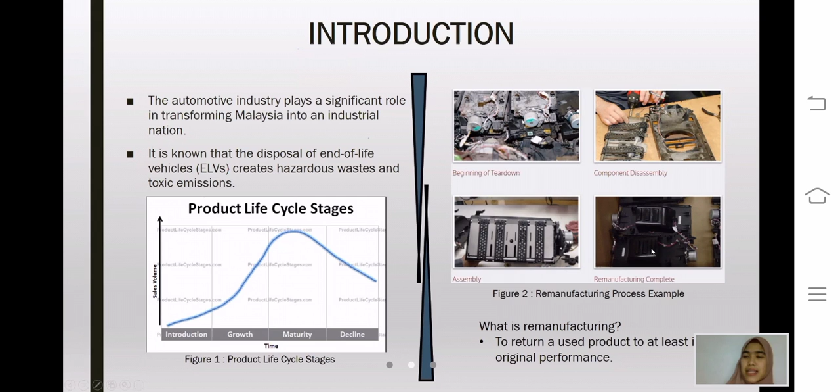Next is problem statement. There are three problem statements: remanufacturing will be considered as a new strategy to overcome the environmental sustainability problem, especially for the automotive industry.

As we know, in Malaysia, the automotive industry still follows the global legislation, namely the European Union Directive towards ELV, which is reuse, recycle, and reduce. The ELV vehicle will contribute to hazardous waste and toxic emission. It has been said by Vladimir Simic in 2013.

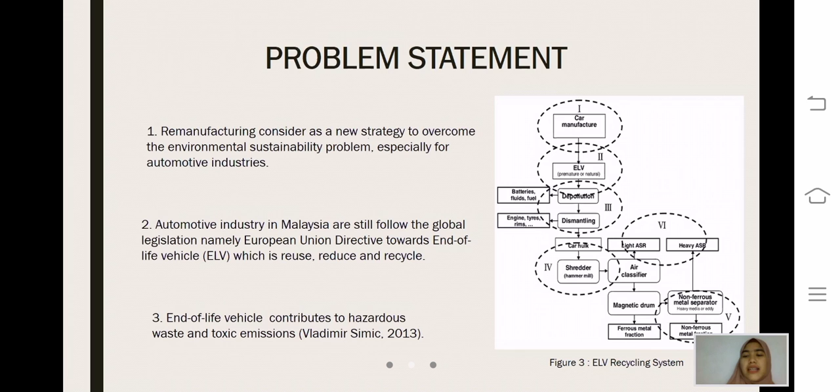Figure 3 shows the ELV recycling system, which has six stages of recycling system of ELV.

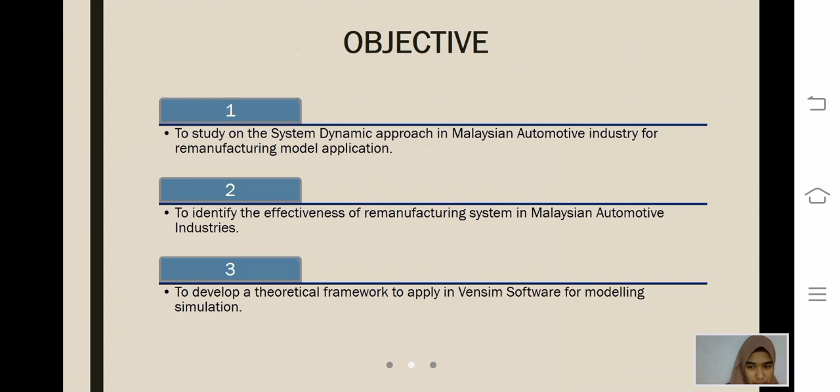In this project, there are three objectives: to study the system dynamic approach in Malaysian automotive industry for remanufacturing model application; second, to identify the effectiveness of remanufacturing system in Malaysian automotive industries; and third, to develop a theoretical framework to apply in Vensim software for modeling simulation.

For this project, we have made a literature review focusing on three main points: the automotive industry in Malaysia, the system dynamic, and the remanufacturing.

The production of vehicles has shown a large increase every year, as classified by Clark in 2015. Figure 4 shows the production of vehicles from May 2019 until May 2020.

In 2019, the production of vehicle was very high, but in 2020 the production of vehicle was low. This is due to the pandemic situation, the COVID-19 disease. If not for that, I'm very sure the production of vehicle in 2020 would be higher than 2019.

In Malaysia, the automotive manufacturer still prefers to use new parts in their product, even though it is possible to replace worn and damaged parts with recoverable components. It has been said by Amelia in 2009.

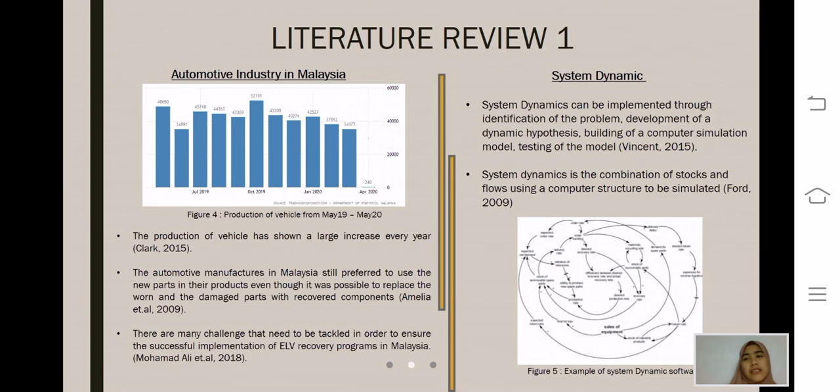Ford has classified that system dynamic is the combination of stocks and flows using a computer structure to be simulated. Figure 5 shows a simple example of system dynamic software, using the Vensim software. Next is remanufacturing.

Remanufacturing is a form of product end-of-life strategy, often called 6R. What is 6R? It is recover, redesign, remanufacturing, reuse, recycle, reduce. There are six, and remanufacturing is one of them.

Remanufacturing is the process of bringing an end-of-life product back to as good as new. It has been said by Shanshan Yang in 2018.

Figure 6 shows the example of the remanufacturing system model, which is after the end-of-life product is sent to the supplier, it will start the remanufacturing operation, and after the remanufacturing operation is done, it will commercialize back.

It will be sold to the client as the same product, but it's called a remanufactured product.

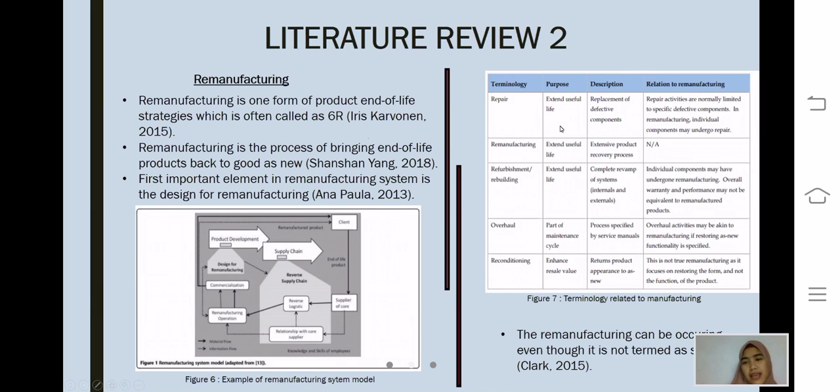Next, figure 7 shows the terminology related to remanufacturing, which is repair, remanufacturing, refurbish, overhaul, or reconditioning. But Clark in 2015 has said that remanufacturing can be occurring even though it is not termed as shown in this table.

Next is methodology. For this project, this is a flowchart for FYP1 and this is the flowchart for FYP2. In FYP1, I will complete up until the methodology process. This shows the flow process of this FYP.

For the planning flow process for FYP2, I will make analysis and research, and after that I will suggest a theoretical framework to be applied in the Vensim software to make a modeling simulation.

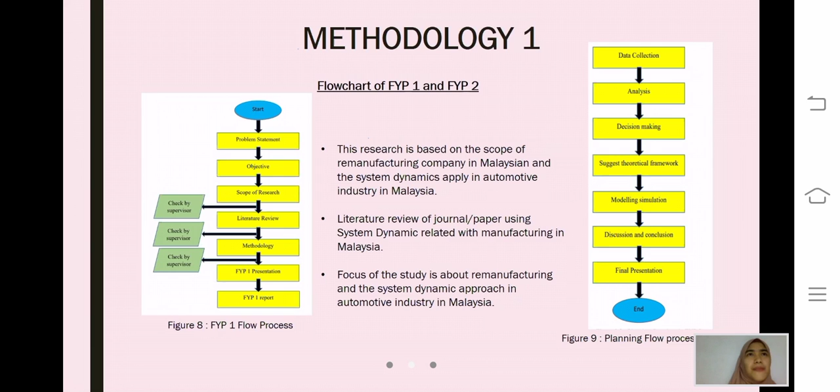Basically, this research is based on remanufacturing, system dynamic, ELV, product life cycle, and some case studies that have been made before.

Research on the case study - second, we make a research on remanufacturing company in Malaysia. As an example, Aimi Hassan has made a case study in motor technology and industry, called MTI, in Rawang. Figure 10 shows the MTI remanufacturing process.

Until the assemble and testing commissioning. What is the product? The product that has been remanufactured by the MTI company is a marine generator.

Figure 11 has shown the example of remanufacturing product that has been done by MTI company, which is the marine generator, and the problem of this marine generator is defect on the crankshaft.

This is the step of how to remanufacture the product. There are 9 steps, starting with physical inspection until the final inspection, and this is an example for the engine.

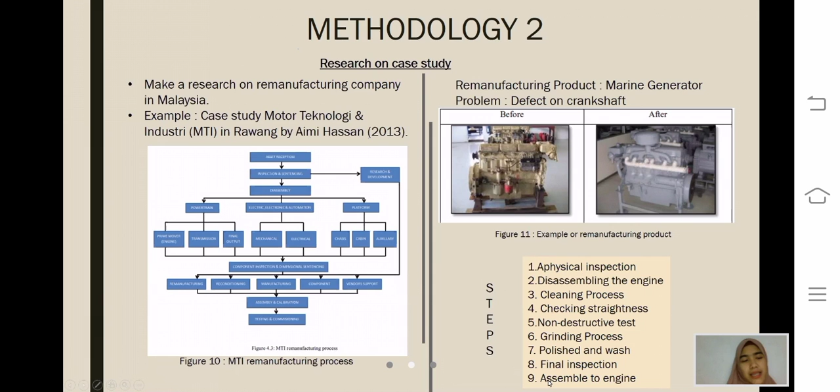The last methodology is theoretical framework, which is after the analysis has been done based on methodology 1 and methodology 2, we will suggest the theoretical framework to be applied in the Vensim software.

Why do we need to use the Vensim software? Because the Vensim software is more flexible than most in the appearance of the model diagram.

Basically in our project we study journals, articles, or research with theory. With this, what I get is only the facts and the theory. I don't have data or experiments to complete it. That's why Vensim software is the most suitable software for this project.